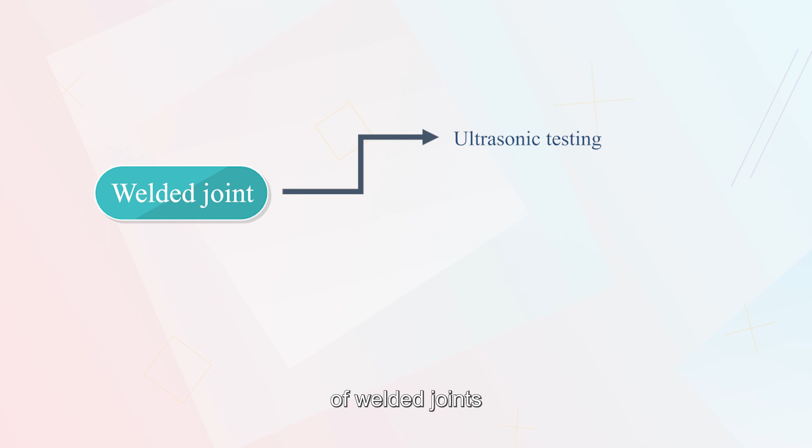Hello everyone. Today we will learn about the ultrasonic inspection of welded joints. The ultrasonic testing of welded joints is more complicated than ultrasonic testing of sheets, forging, casting, etc.

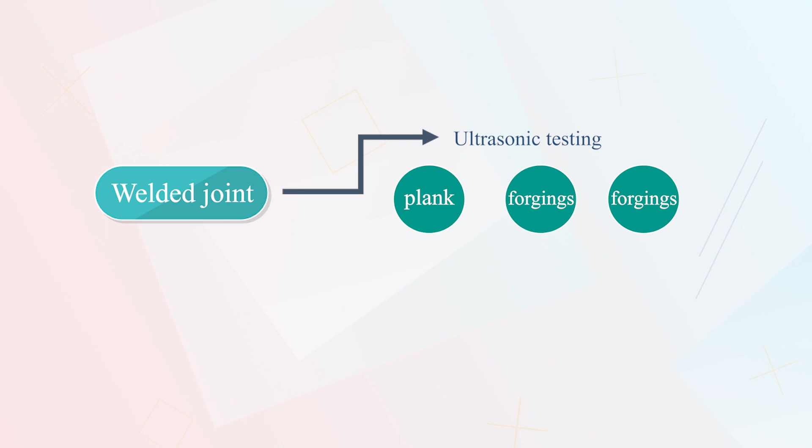We divide it into several parts while talking and operating: 1. Preliminary knowledge. 2. Inspection implementation. 3. Defect evaluation. 4. Test report.

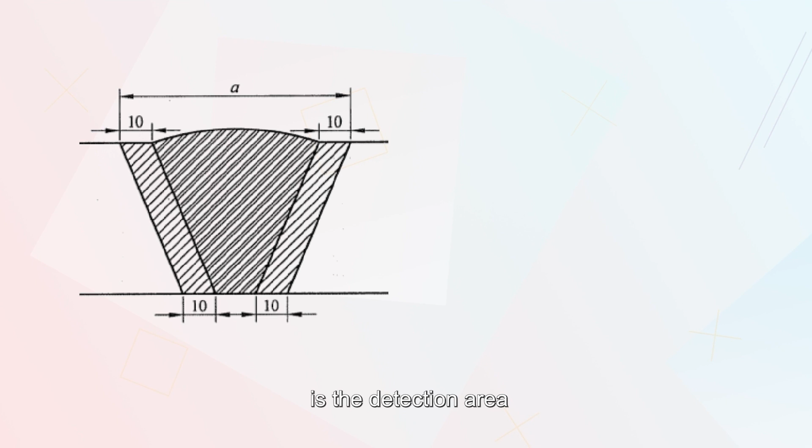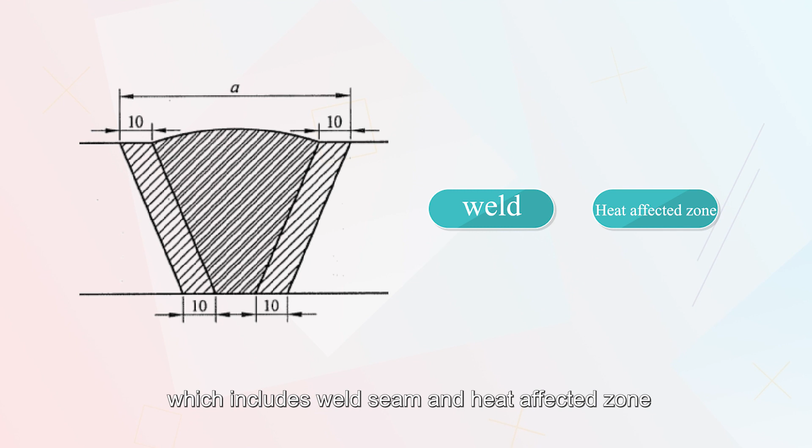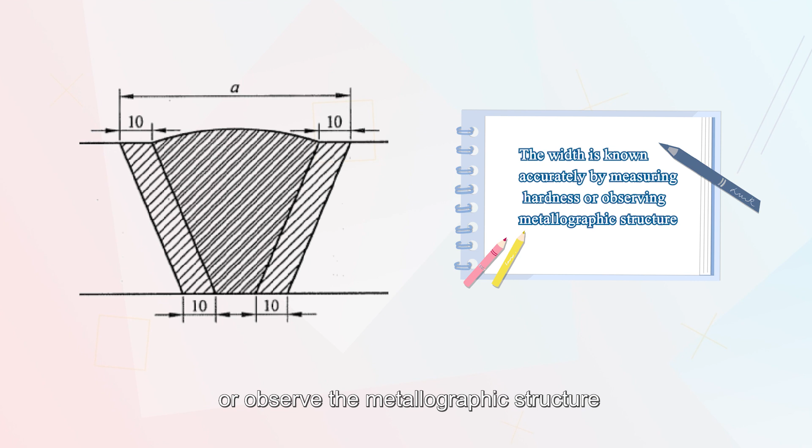The first prerequisite knowledge is the detection area. The so-called detection zone refers to the area that needs to be detected, which includes the weld seam and the heat-affected zone. Different welding methods have different heat-affected zone widths. In order to accurately know the width value, we can only measure the hardness or observe the metallographic structure.

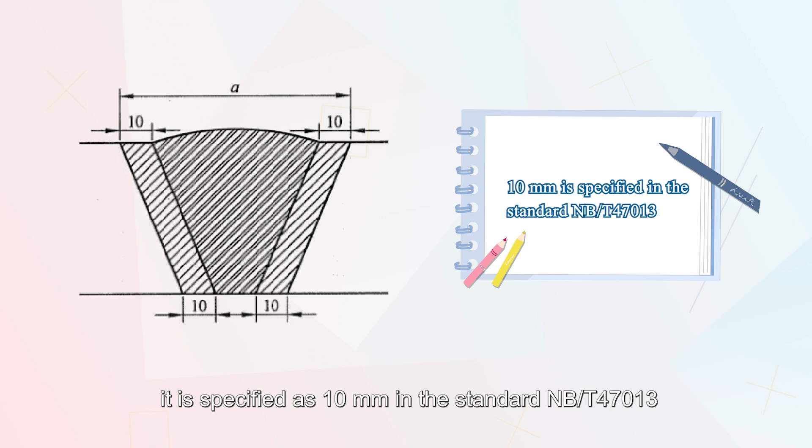Usually, it is specified as a fixed value in the non-destructive testing standard. For example, it is specified as 10 mm in the standard NB/T47013. 2. Probe moving area.

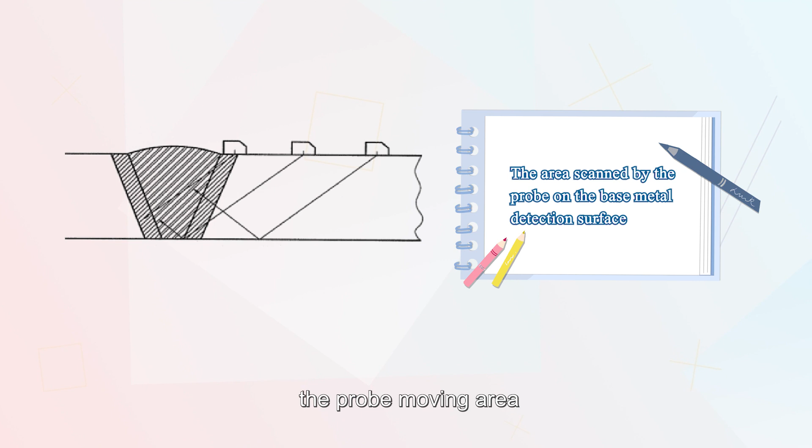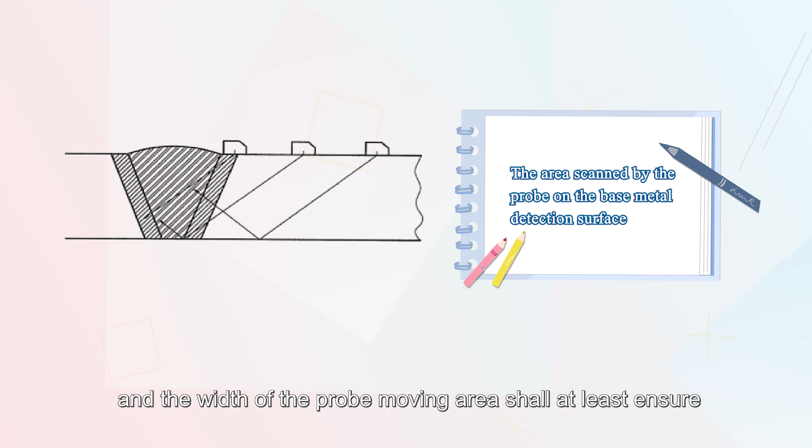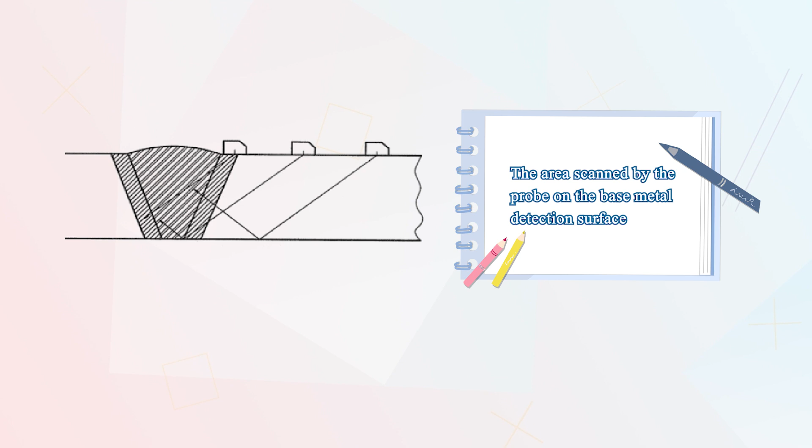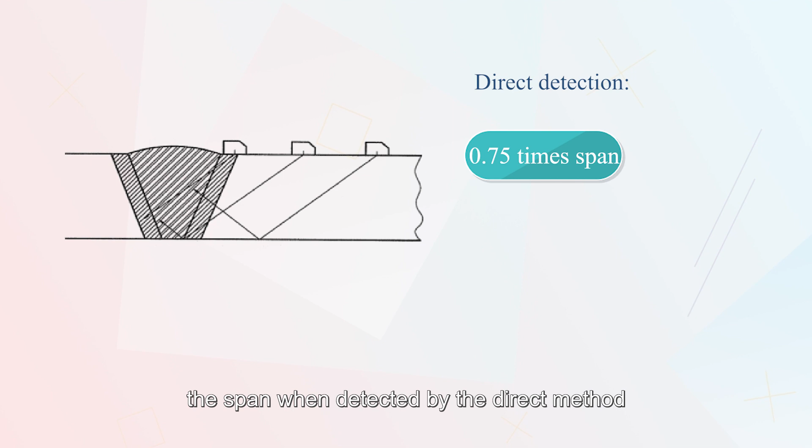The probe moving area is the area that the probe has scanned on the base metal inspection surface during inspection, and the width of the probe moving area shall at least ensure that the ultrasonic beam can scan all detection areas. It is easy to obtain the theory: it is 0.75 times the span when detected by the direct method, and 1.25 times the span when detected by a reflection method.

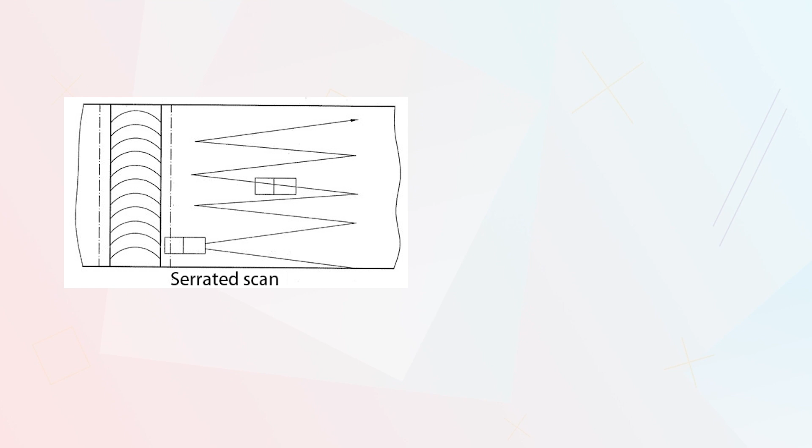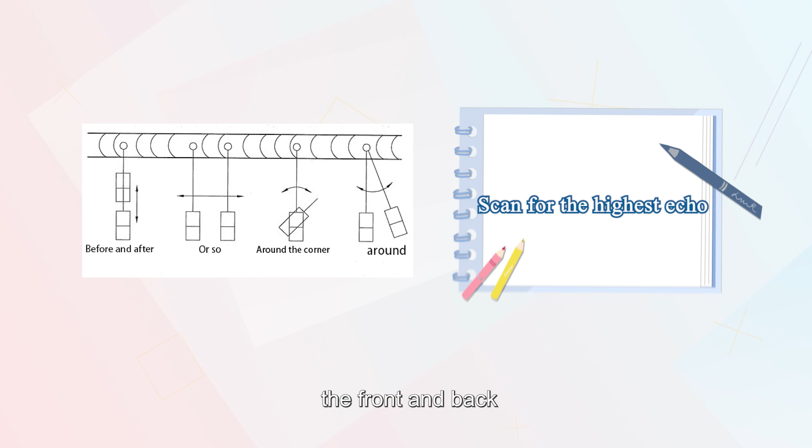3. Scanning method. Ultrasonic inspection of welded joints should first use a zigzag scan to find defects. When a defect is found, the front and back, left and right corner, and surrounding scan methods should be used to find the highest echo of the defect. The longitudinal length of the defect is determined by scanning left and right.

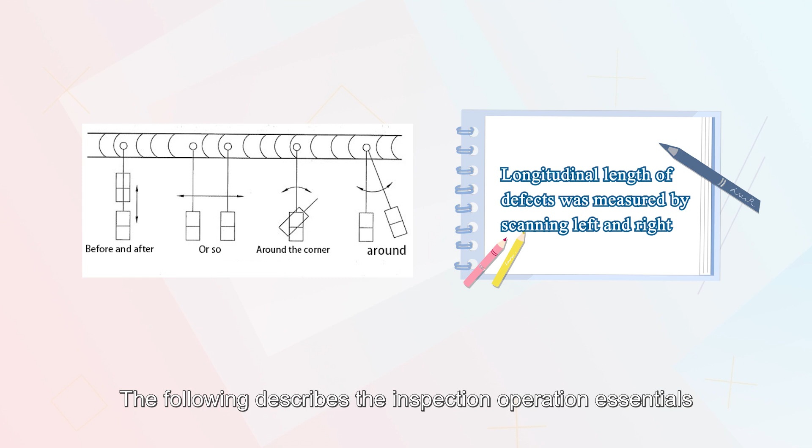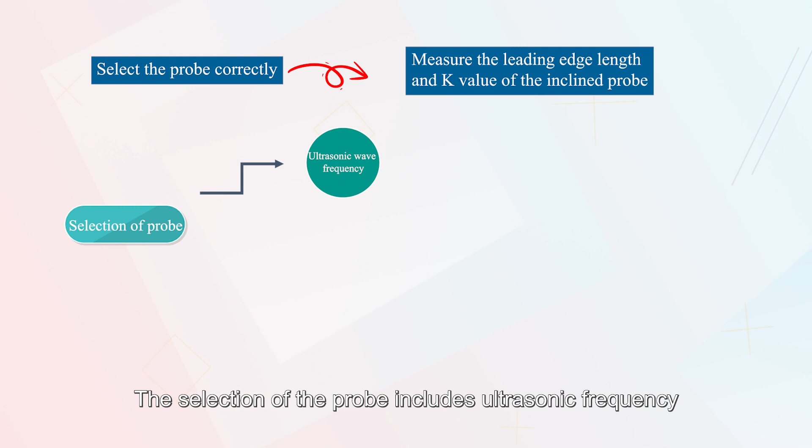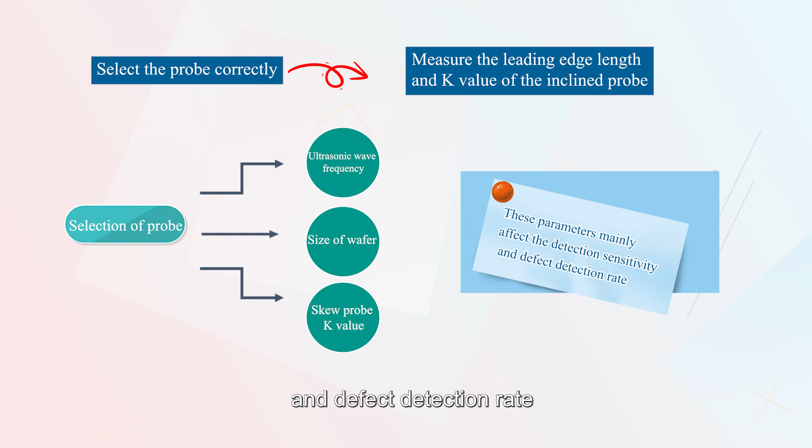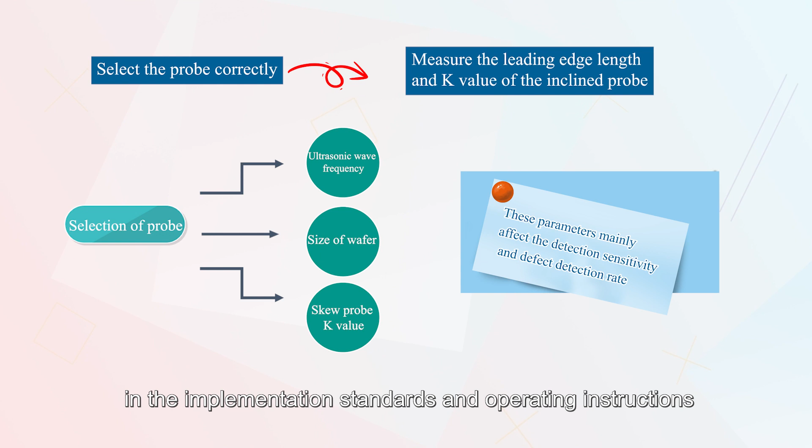The following describes the inspection operation essentials of welded joints one by one according to the inspection process. 1. Select the probe correctly and measure the leading edge length and K-value of the inclined probe. The selection of the probe includes ultrasonic frequency, wafer size, and the K-value of the inclined probe. These parameters mainly affect the detection sensitivity and defect detection rate. Generally, there are corresponding provisions in the implementation standards and operating instructions. Their determination was described in the previous video and will not be repeated here.

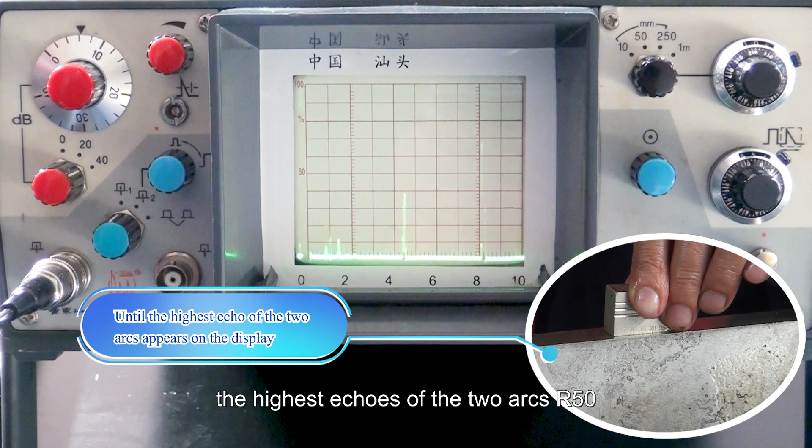2. Calibrate the time baseline of the instrument and determine the appropriate scanning speed. Place the probe near the center of the arc of the CSK-IA test block with a radius of 100 and slowly move the probe left and right until the highest echoes of the two arcs, R50 and R100, appear on the display.

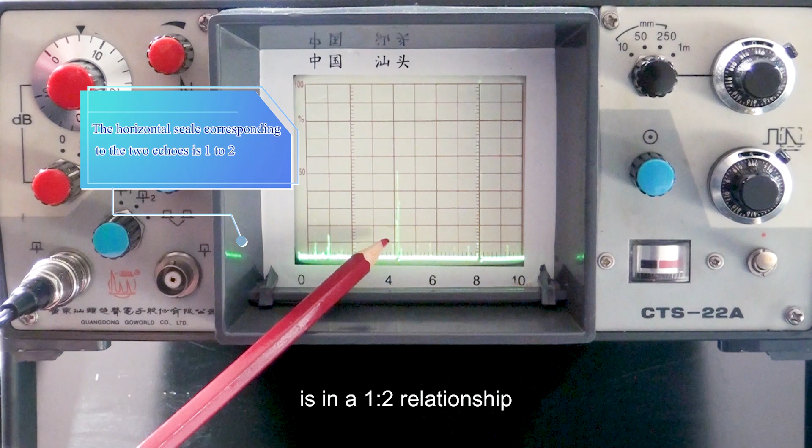Note that the wave heights shall not be lower than 20% of the full screen height. Fix the probe and adjust the pulse shift and depth fine adjustment knobs so that the horizontal scale corresponding to the two echoes is in a 1:2 relationship. Then turn the probe to probe the transverse hole with a depth of 15 mm on the test block. Adjust the depth fine adjustment knob so that the echo scale is at 1.5.

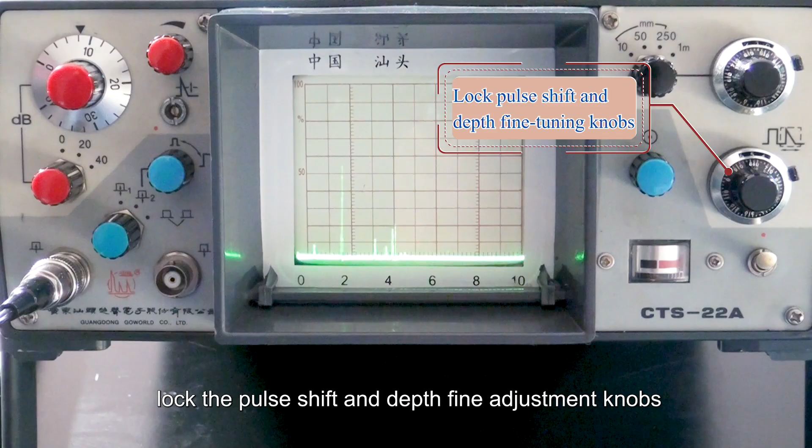At this time, after adjusting the scanning speed according to the depth ratio of 1:10, lock the pulse shift and depth fine adjustment knobs. Let's start to draw the DAC curve.

The base metal thickness of the inspected weld is set to be 30 mm and the inspection level is B. According to the standard NB/T47013, the single reflection method should be used for detection. So the buried depth of the artificial reflector corresponding to the DAC curve should cover 2 times the thickness of the workpiece, that is 60 mm.

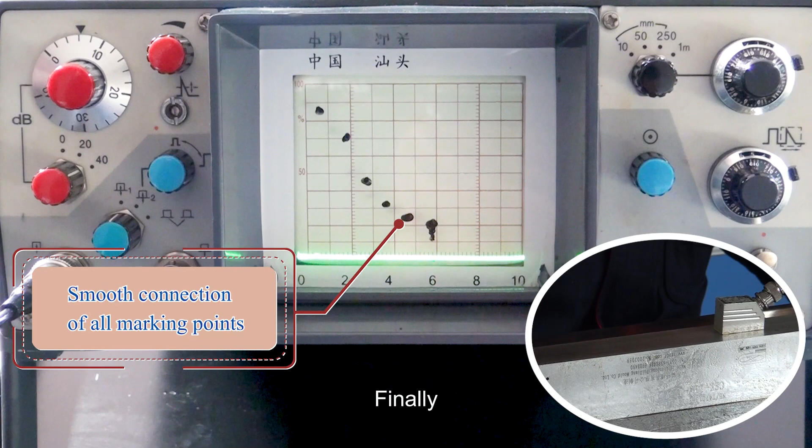Use the same method to measure other depths of 20, 30, 40, 50, and 60 mm transverse through holes and make a mark at the wave crest each time. Finally, connect all the marked points smoothly. The DAC curve is drawn.

Next, determine the sensitivity. According to the standard, the detection sensitivity shall not be lower than the evaluation line. Reduce the attenuator reading by 18 dB plus 2 dB surface compensation, a total of 20 dB. This is the evaluation line, which is the detection sensitivity.

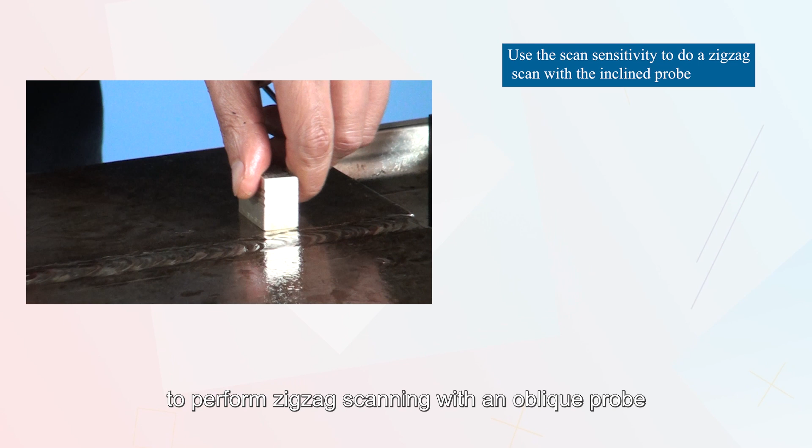Draw the detection area and the probe movement area on the workpiece. Increase by 6 decibels again. Use the scanning sensitivity to perform zigzag scanning with an oblique probe.

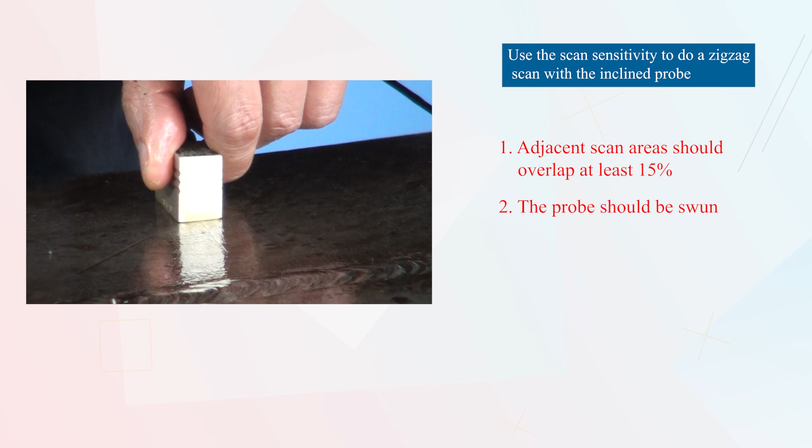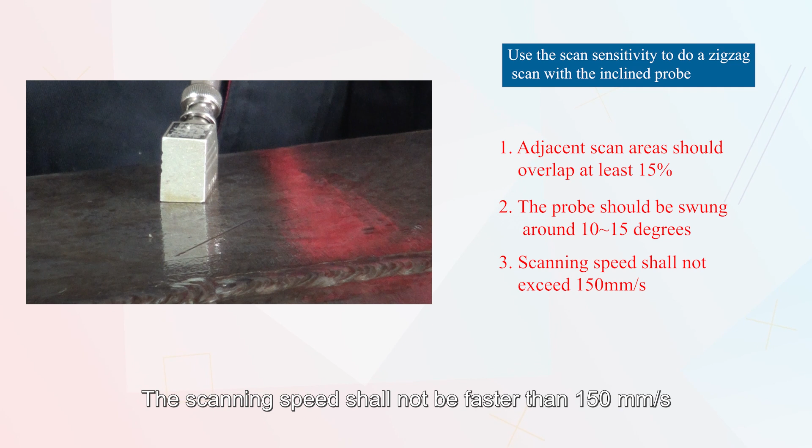There are a few points to note. 1. The adjacent scanning area should overlap at least 15%. 2. The probe should swing 10 to 15 degrees from side to side. 3. The scanning speed shall not be faster than 150 mm/s. When the echo amplitude on the display screen is higher than the evaluation line, mark the workpiece, excluding surface defects, through defect location information.

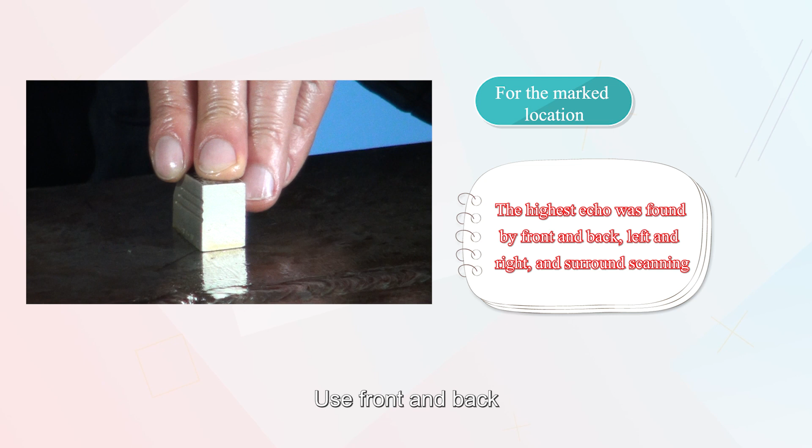Awaiting further testing, for the marked position, press the detection sensitivity again to detect. Use front and back, left and right, and surround scans to find the highest echo and record the corresponding defect position and echo amplitude on the record sheet.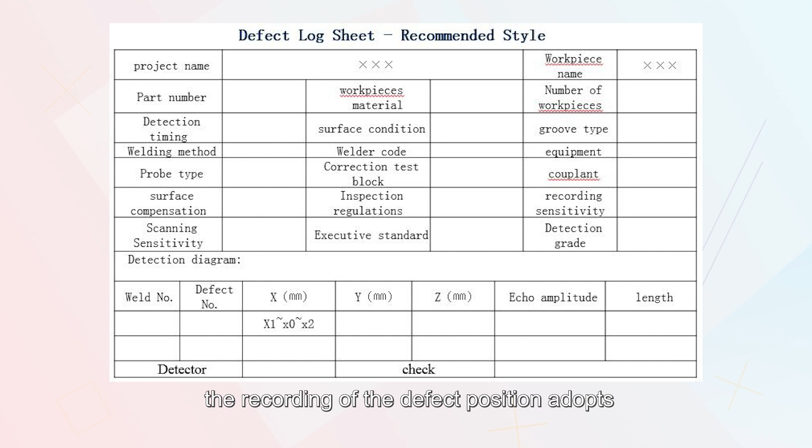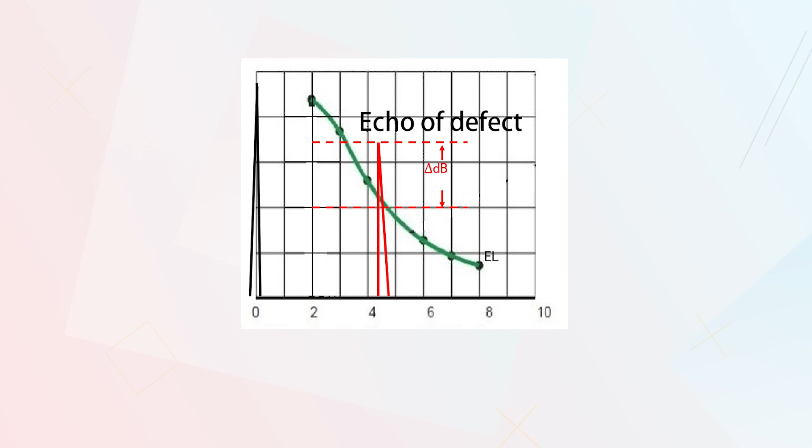The recommended style of the record sheet is shown in the figure. The recording of the defect position adopts the coordinates method as shown in the figure, and the recording method of the echo amplitude is EL plus how many decibels. Use left and right scanning to measure the defect length and record it.

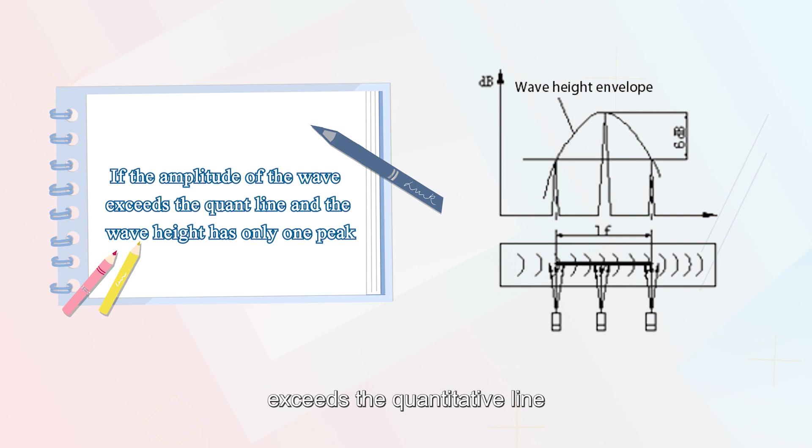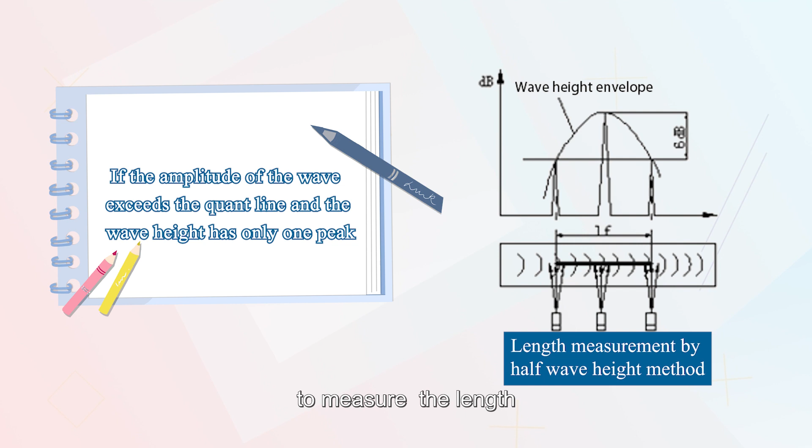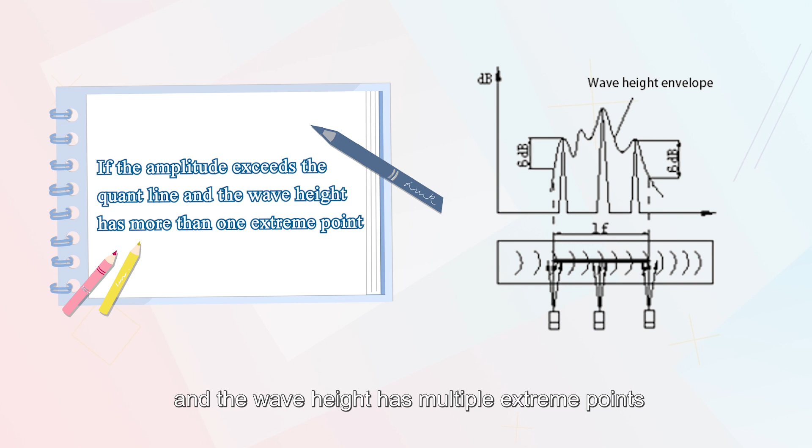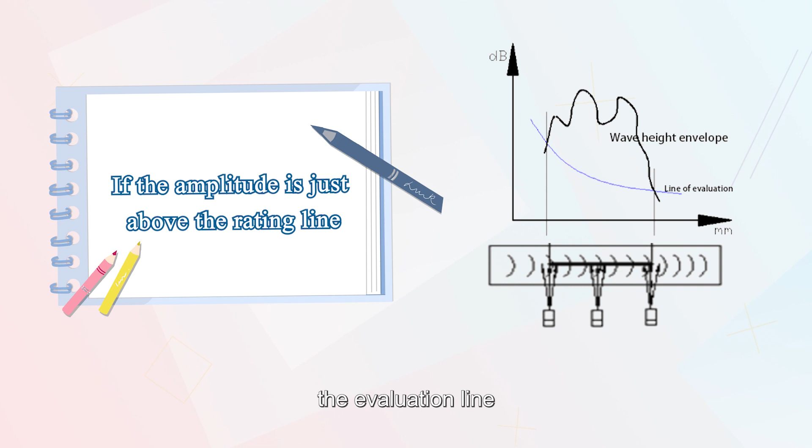It should be noted that if the wave amplitude exceeds the quantitative line and the wave height has only one highest point, use the half wave height method to measure the length. If the wave amplitude exceeds the quantitative line and the wave height has multiple extreme points, use the endpoint half wave height method to measure the length. If the amplitude only exceeds the evaluation line, use the evaluation line absolute sensitivity method to measure the length.

In addition, the Cartesian coordinate system is established on the workpiece, and the coordinates of the defect are measured and recorded as the final defect position.

Lateral defect detection is described below. The detection sensitivity of transverse defects should be 6 dB higher than that of the longitudinal defects, and oblique parallel scans should be performed from opposite directions. The other defect recording methods are the same as above.

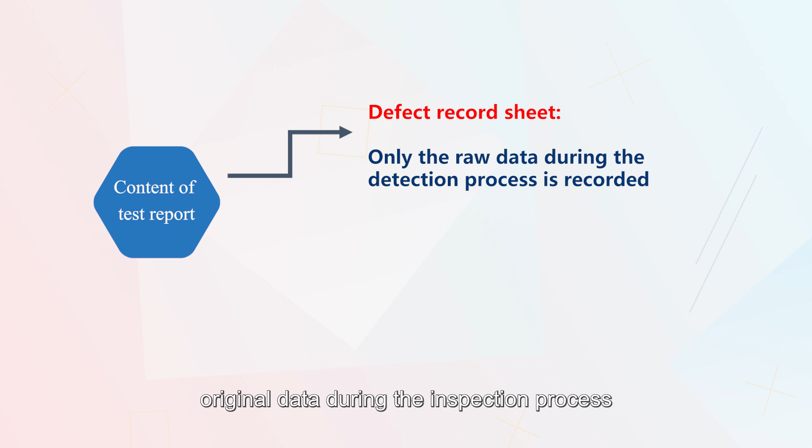When all defects are detected and recorded, the quality of welded joints shall be evaluated in accordance with the acceptance criteria, and a test report shall be issued. The content of the test report is mostly the same as that of the record sheet. The difference between them is that the defect record only records the original data during the inspection process, while the inspection report contains the quality level conclusion made by the inspector according to the standard.